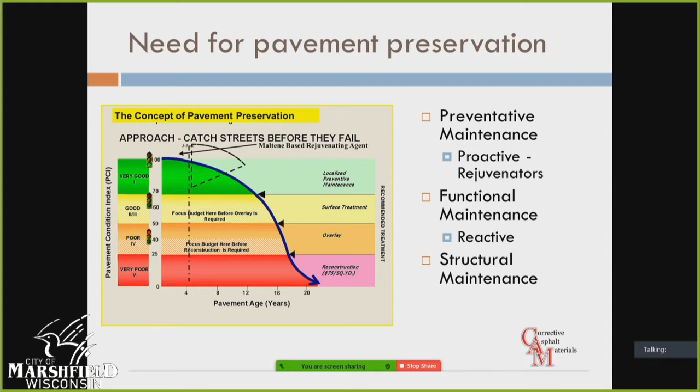But I was going to focus majority on that green section and how to get the most for your money there. Ideally, if you're treating in that green section, instead of bumping your curve out, you're actually bending that curve and adding those extra years onto the life of the pavement.

So the proactive maintenance in that green section - the first step in pavement maintenance is proactive. I like to use the analogy of a deck. The first thing you do to that deck, since it's wood, is seal it because you want that wood to last as long as possible. You continue to seal that wood because you want to keep it good for as long as possible. Decks are not cheap to put in. Same thing with your road - you want to get that road sealed up right away, protect that pavement and protect your investment.

Usually with this proactive approach to asphalt maintenance, you're looking in that 0 to 5 year range. You want to get in there right away when the pavement is in good condition, seal it up, and keep it there for as long as you can. By being proactive in this, you're adding about 5 to 7 years onto the life of the pavement. It's pretty significant - and you can still do any other treatment you'd like to do, you're just pushing all of that further down the road.

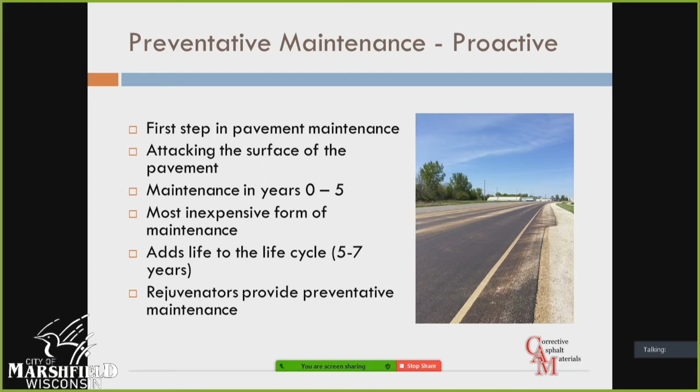Not all products in that green area are considered rejuvenators. According to the National Center for Pavement Preservation, you need to be a maltene-based petroleum product to be a real rejuvenator. Other products will come in and say they're a rejuvenator, but if they're not maltene-based, they are not a rejuvenator. So that's something you need to look for.

I'm going to talk a little bit about maltenes. It's so exciting, and you guys are lucky because today is Maltene Monday. If you follow us on social media, we've been starting our new campaign. There's a relationship in asphalt between your asphaltenes and your maltenes, and those are what make up your asphalt binder.

Maltenes are added to the pavement. That's what keeps it soft and flexible, but that's what gets baked out of the asphalt through the oxidation process. As soon as your asphalt comes out of the plant, it gets heated up really hot, then it gets laid out, and those maltenes are being baked out of the asphalt itself. So what the Reclamite's going to do is replace that maltene fraction back into the pavement. If we go back to the definition of what a rejuvenator is, that's exactly what you want to do. You want to replace that maltene fraction, and slow down that oxidation process.

Your asphaltenes, if a product is asphaltene based, you're looking at the hardening agent. That's what's going to keep that surface harder, brittle on top, and you're going to see more aggregate loss at the surface. So that balance is really important, your asphaltene to maltene ratio.

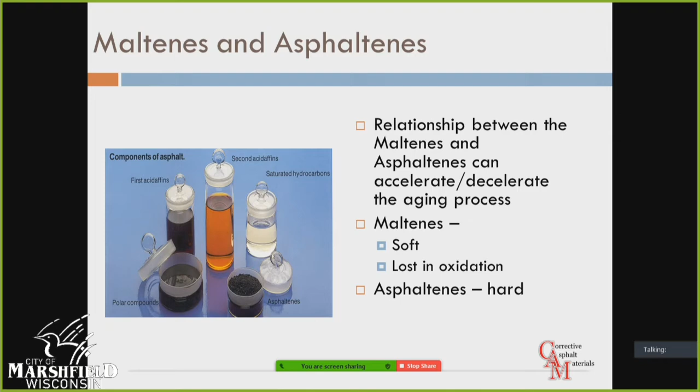I'm just going to talk about Reclamite. It's our maltene-based rejuvenator, a quick application with minimal screenings, applied in that 0 to 5 year range. Since I'm talking about two products, I don't want to confuse everybody, so I brought some material if you'd like. Reclamite is the early, proactive treatment, and CRF is the older, reactive treatment. I'll keep saying that throughout.

This was the little demo we did for Marathon County. They put this on brand new pavement. We came in right after they laid it and treated it. I came back about two months later, and you could see the rest of the road around it was wet, while the treated portion was completely dry. You can see it on the shoulder for sure right there, and you can also see that your striping is intact. I got better photos of that to show.

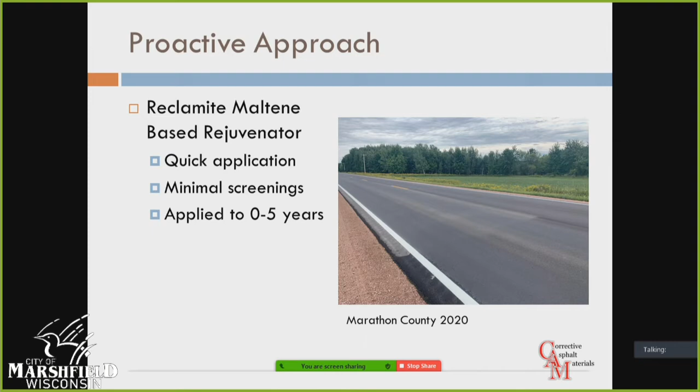Now this is the reactive one, your CRF. Here in Marshfield, you guys had a lot of roads with slag chip seal, and they needed a way to make that last longer so you didn't have to spend money on reconstruction, that red zone where you're spending all the money. This was something new that we tried on the slag portion at least—we've put it over chip seals before, but not with slag aggregate. So we tried it out, and these are the results. I came back in September, and it looks amazing. It's really staying on there, holding on nice.

The CRF is the same product as our Reclamite, only it has a little bit of asphalt content in there. Because it's in that orange zone, it's going to add a little bit back to that surface. There's actually no lift to the pavement at all, but it's going to fill in those smaller cracks and voids, smooth it out, and keep that water out.

Neither of our products add lift to the pavement. They're both in-depth seals, so you're not going to see a plow get underneath it and pull it out. Once it's on there, it's there for the duration of its life. It's not going anywhere.

Usually with the CRF application, you have a heavier amount of screenings that we'll be putting down, and the setup time is a little bit longer. We want roads that are older—I've seen roads that are 3 years old that really could use some CRF, but hopefully we can get roads at least into that 5 to 7-year-old range before we have to come in and apply the CRF. Usually candidates show mild alligatoring, aggregate loss at the surface, and mild cracking.

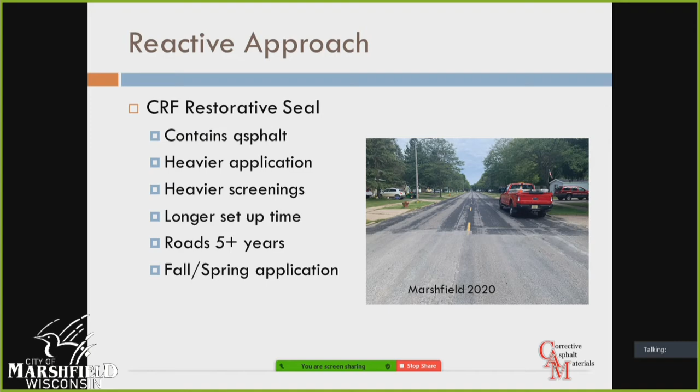All right, so I got into the application process. This is more important for, I guess, us and then also residents as well. They probably like to know about this. We start out with our road selection, which is when I came up, we looked at all the pavement that we had to work with, and I don't want to put product down on a pavement that's not ready.

If it's too far gone for Reclamite, we're not going to put it on the pavement. It's not going to do its job. It's not going to work. CRF, same deal. If it's too far gone and you guys are going to need to come in and do something else that's not CRF, perfect.

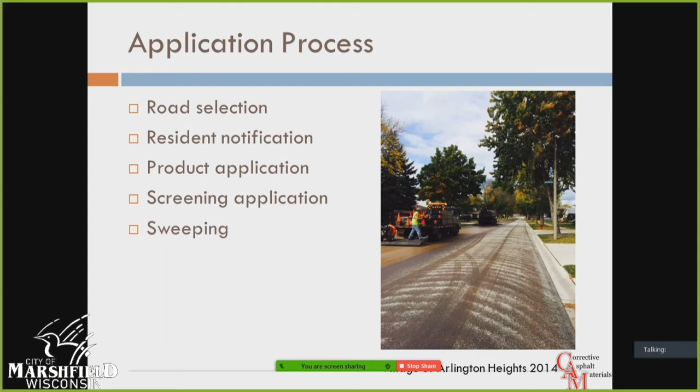Also, if you look at the timeline, now you got a toolbox of tools. Almost every product out there has a spot in that timeline. And you can still do everything else. You're just pushing those more expensive applications and tools further back. So you could still come back and do a chip seal, a microsurface, or a crack fill. You're just doing it much later down the line than you would had you not sealed up your road at the beginning.

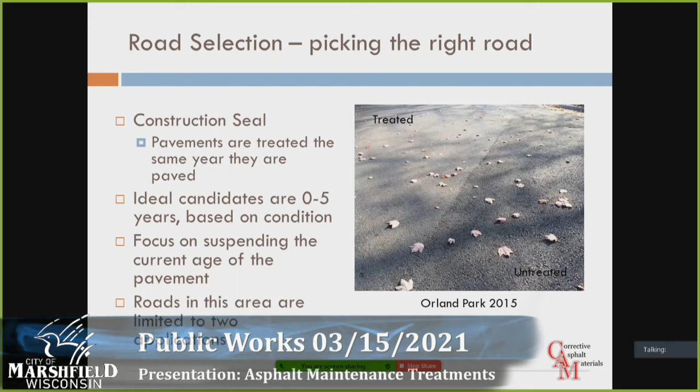Road selection, construction seal. This is what I talked about with Marathon County. We came in, we did brand new pavement. But the great thing about that is you're sealing it up before it hits that first winter. All that water intrusion, that salt intrusion getting in that pavement. By sealing it up, keeping that water out is so important. You don't want that water to get into that pavement and help you lose that aggregate surface.

Like I said, 0 to 5 years, we're suspending the age. We're not reversing the age. So when we come in, we treat 1-year-old pavement. It's pavement that's been sitting for 1 year, has had winter on it, and that's fine, but it's not going to reverse that aging. It's going to hold it where it's at. So if there's one large crack in the road, it's not going to magically make the road come back together again. In this area, you're limited to about 2 applications of Reclamite.

I wouldn't recommend more than that, just because with our freeze thaw, with 1 application of Reclamite, you're going to see a lot of tightening on that pavement. I'd say if you're going to do a second application, you could probably come back in year 5 or 7, depending on what kind of program you have. We're going to use a little less product on that second one because the first application does make it tighter. You'll see that at the surface when I get through some of these photos. But that's about your limit with the Reclamite.

CRF, when you put it on older pavement, it depends on how long. I've had people who want to get just 2 more years squeaked out of a pavement. So this was a solution that worked for them. I've had people put 3 applications of CRF down within a life cycle.

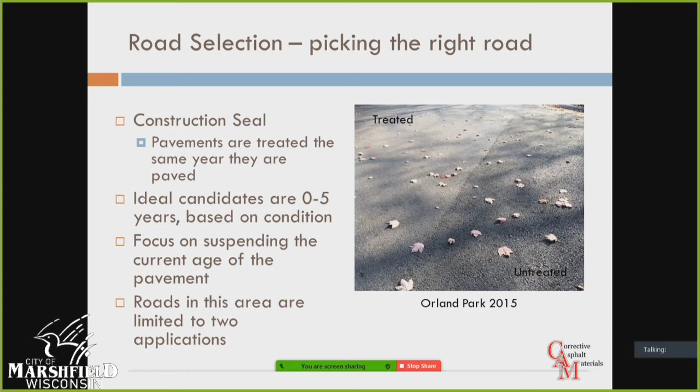So resident notification, we handle it. You guys can handle it. We kind of try to do like a la carte with the pricing anyway for you guys. So whatever you guys want to do, a letter, on our website we have now this year, we have videos and photos, specifically a tab for residents that they can visit and see why they're doing this, what's going to happen, and most importantly, when it's going to be cleaned up, because that's what they care about the most.

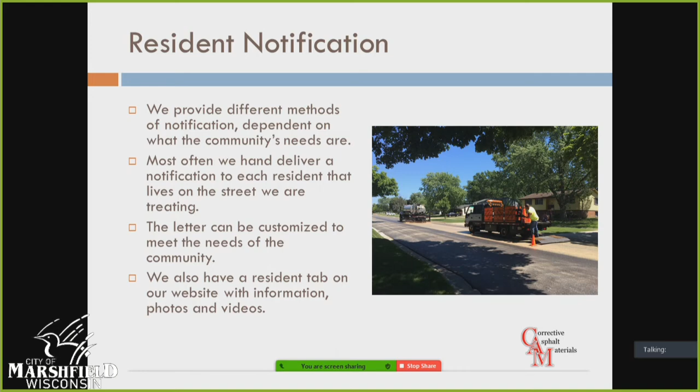Conditions, obviously, we want ideal conditions, 40 degrees and rising, just like when you're paving. We want dry roads, so that is important.

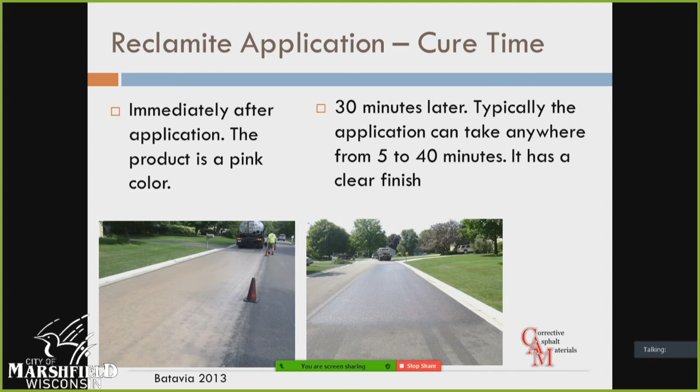So this is your Reclamite application. It goes on this cute pink color, and then in about 30 minutes, it just dries clear. Clear finish is on there. Depending on how hot it is, it could be 5 to 40 minutes. I'd say 30 minutes is about average. Usually by the time the truck's finished and turns around, we can go ahead and do this.

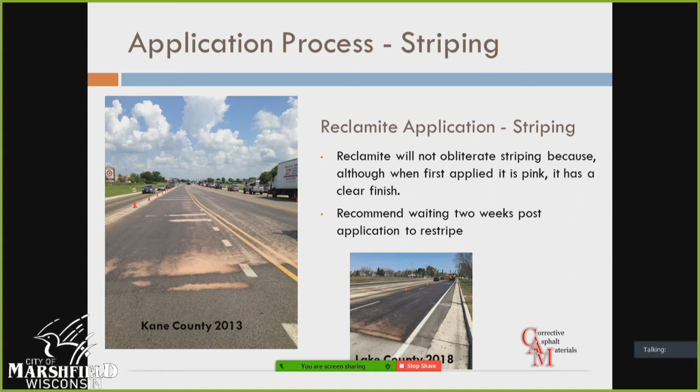Your striping will come through. What's a nice, great thing about the Reclamite is you have a brand new pavement with brand new striping, and you don't want something that's going to cover that up. It's an extra added cost. With the Reclamite, it's a clear finish that striping comes through. You're going to be able to see it again. It will tinge it temporarily, but with regular weathering, it does come back. So that just wanted to show you. If you are going to restripe, I'd recommend 2 weeks.

Anyway, so sweeping.

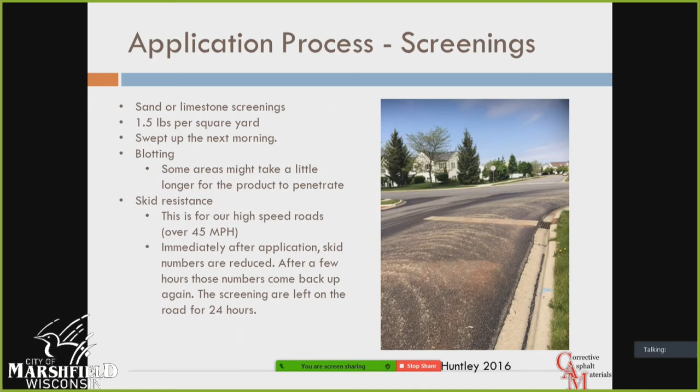Temporarily, those numbers are reduced, but they come back within a few hours. We leave the screenings down for 24 hours, and this photo shows that as well. And there you go, another stop bar popping through.

So then the CRF application takes about 40 minutes to an hour. You're putting it down in colder temperatures. We put this down at a heavier application rate than we do the Reclamite, so we're using a lot more product. It is a little bit darker, but it does have asphalt in it, so it's going to have that darker look.

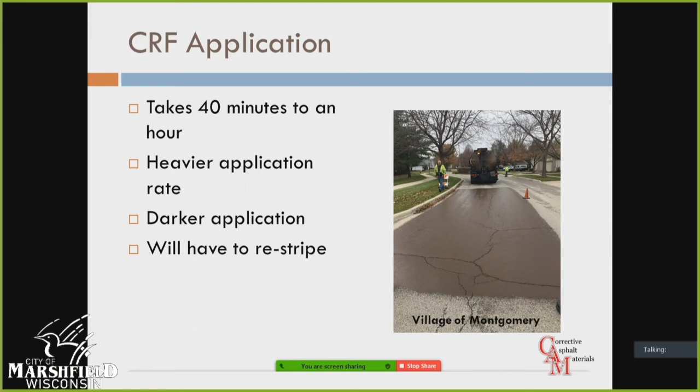It does not finish black, it finishes in a gray color. And you will have to restripe after the CRF, only because it has asphalt in it, so it will cover up your striping. So if you are going to stripe, I recommend waiting 2 weeks after doing that.

Like I said, with the heavier application and the screenings here, there's really no effect on skid resistance with the CRF at all, because we put so much down it has a little more grit to it right off the bat. And we like to keep those screenings down for at least a week.

So this is why resident notification is really important on this product, because you get a lot of residents that say, hey, you're chip sealing my street, what's going on? It's like, no, we're going to clean it up, don't worry. So we like to make sure that we have the notification out there early and everybody knows what's going on.

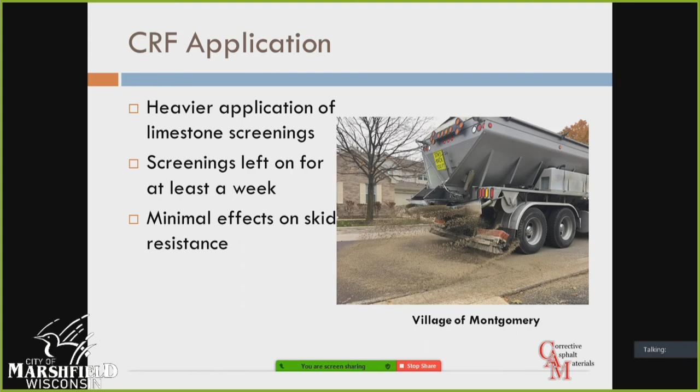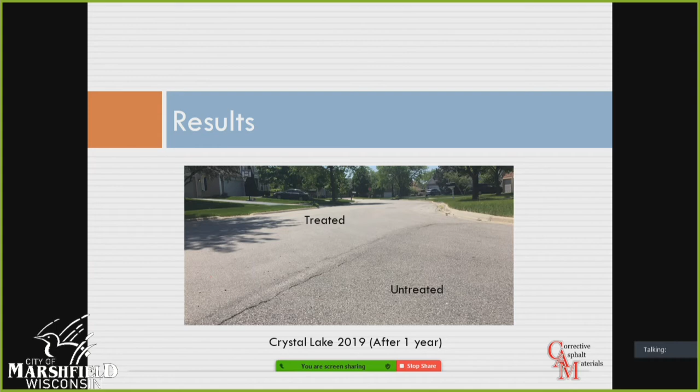Your untreated pavement there is open graded, it's accepting water, and it's oxidizing. And it's a brand new pavement—that's 1-year-old pavement on the untreated portion there. But you can just see how beneficial it is to have that treated portion sealing it up properly.

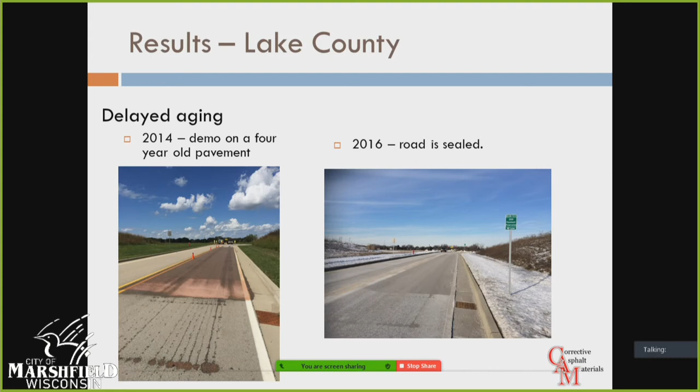I do a lot of county work. This is a county road. I mean, we came back 2 years later, and you can still see where the drip came off the truck for that little demo we did for them. Just that open gradedness, just to show you how tight that pavement could be after 2 years of treatment.

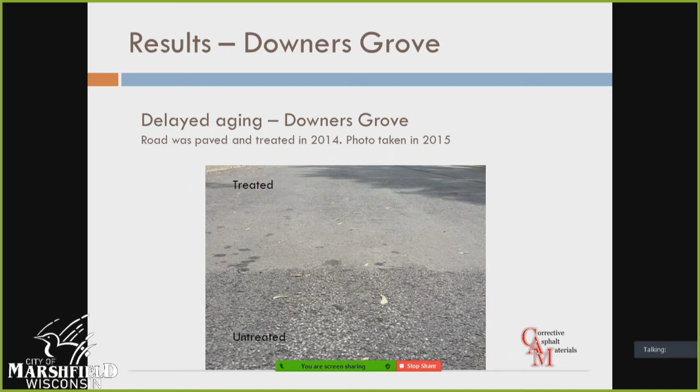This one's a little harder to see, but the next photo will show you. This is the Brookfield, Wisconsin one. So one of the things you're going to see with your treated portions is you're not going to have that water intrusion.

In the morning, you're going to have some residue on the surface, that mist in the morning, though that water is still sitting there underneath, where it's still wet. Your Reclamite-treated pavement is going to dry. So you can see here how the wetness goes right up to the treated section, and everything treated is dry. So that means that pavement is sealed.

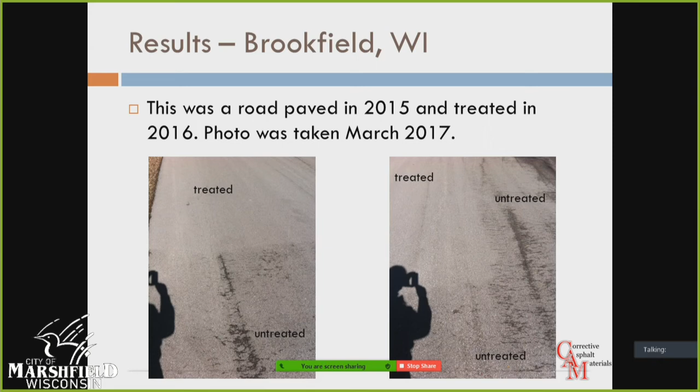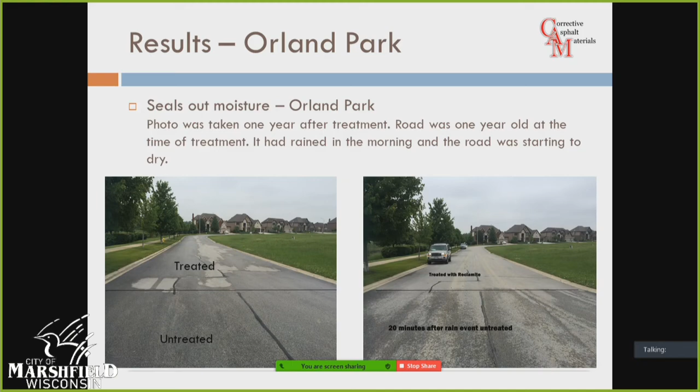Just to show you also the wetness there. I came through after a rainstorm, it was drying. After it dried, as you can see on the other side, the whole treated portion is dry. Everything untreated is wet, and it does look like that. You can see that line—it's very definitive like that.

Just another one, treated it here and then came back after the morning. This is about after a year, just a close-up to show you that tight surface.

So this isn't going to reduce your salt usage, but in a small amount of snow, we find that the snow has a hard time sticking to the pavement. It's because that surface is sealed, the snow has nothing to stick to.

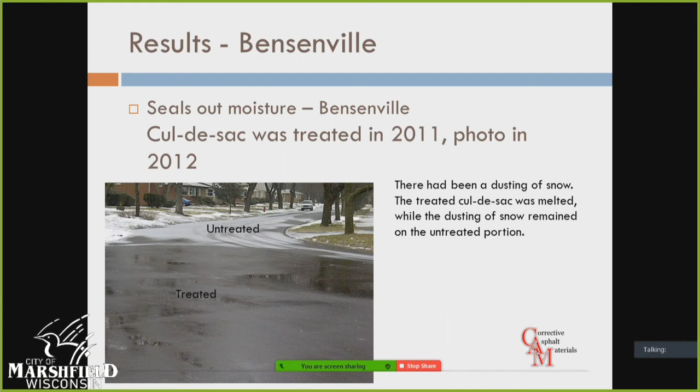And so we have villages and municipalities that claim their salt use is more affected on their treated versus their untreated streets. Quantitatively, I don't have any information for you, as we all know every plow driver is a little different, so it's kind of hard to gauge measurement on how much we're actually saving on salt usage. But I thought this was an added benefit, and I thought it was kind of cool to go out there and actually see it happening.

This just shows you, once your Reclamite becomes part of the pavement, it's there for the duration of its life. It's not going anywhere. So this is 19 years old, and yeah, there's some aging and some raveling and some cracking, but that section that's treated will always age more slowly than everything else.

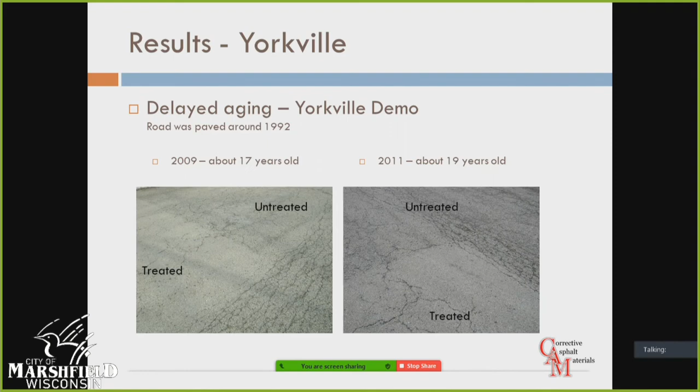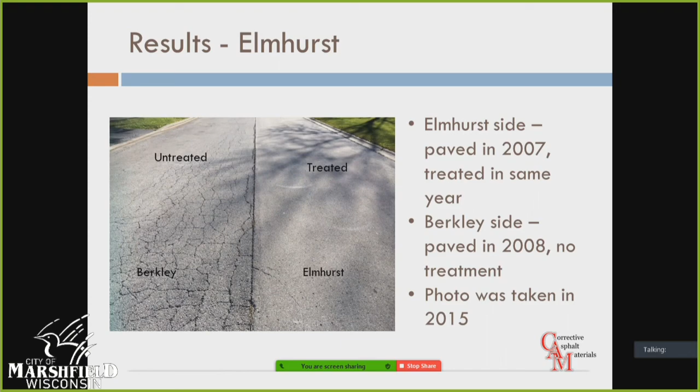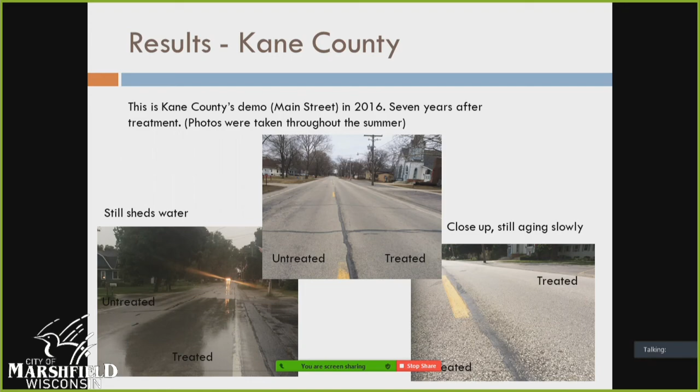Just going through these real quick, and I'll show you some CRF. This is one of my big projects I started in 2009, one of my first with the company and one of my first big county jobs. I'm proud of it because it's still there and looks really good. The untreated side is all deteriorated, falling apart. The treated side is intact, with minimal crack fill used. They're not going to have to do anything to that pavement for a long time still.

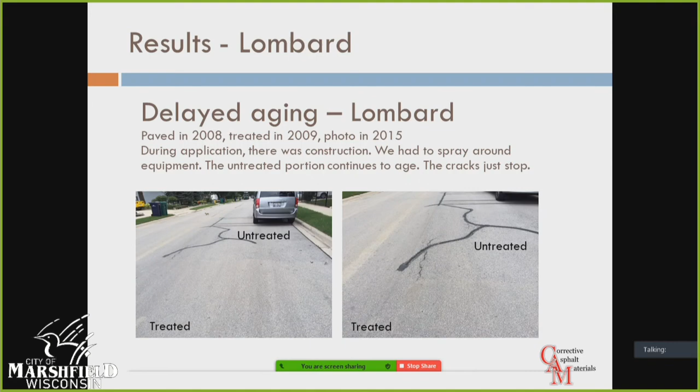Another one right here. I was actually on the crew for this, and you can see the untreated portion had to be crack filled. There's cracks that end right at the treated portion. And here come 2 years after that. You can see how that ongoing oxidation is affecting the pavement, whereas the treated portion is sealed, still intact, still holding on strong.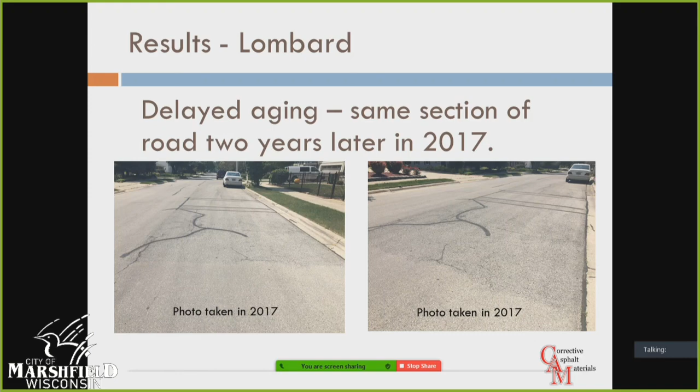Just another one to show that moisture, treated versus untreated. We only treated one side for them. And then I think I move into CRF.

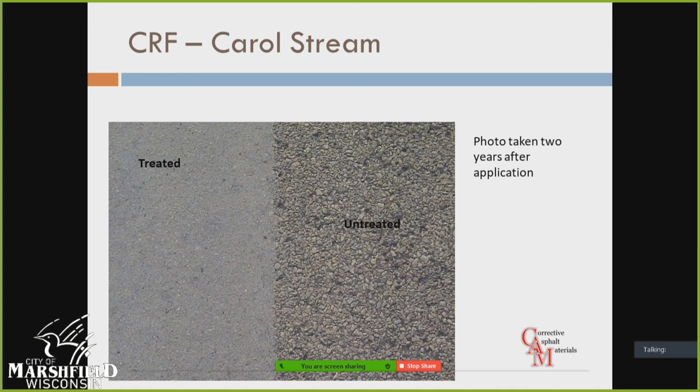So CRF is a little bit different. Like I said, it has that asphalt content in there, and you are adding a little bit into that asphalt. This is Carol Stream. These are the kind of results you're going to see with the CRF. It's going to fill in some of those smaller cracks and voids. It's going to have a little bit of a different look, a darker look. It's not going to be black and sparkly, but it does put a nice, smooth finish onto the pavement.

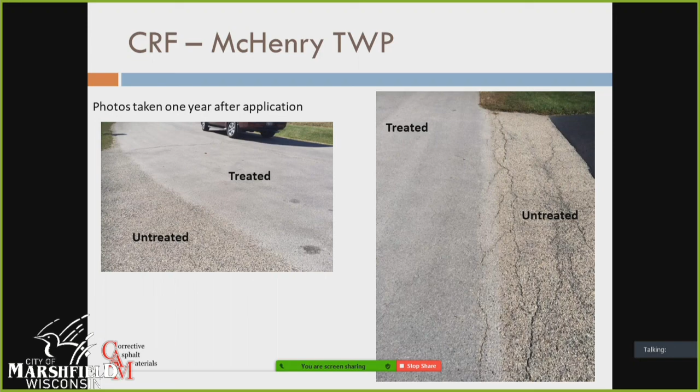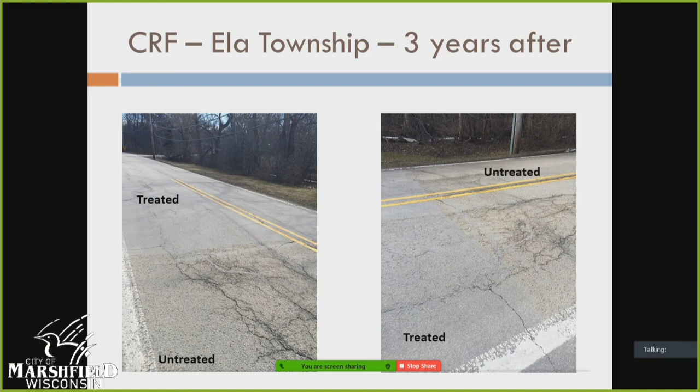This is just another one 3 years after treatment. Like I said, it's not going anywhere. Once it's on the pavement, it's there for the duration of its life. Yep, this is just another little section to show it off. And I believe that concludes my slideshow. If anybody has questions, I'd love to answer them.

Any questions from the board? I do, thank you, presentation was great. But my question is, why do cities do one half of the road and not the other? It's just for demonstration. And we've actually done it where we've come back and treated everything. But it's one thing they can show to see, because sometimes we'll do a smaller pilot project, and they can watch it for a year before they go through. Especially with the CRF, I like to dip our toes in a little bit before they jump in head first, because doing a very aggressive CRF program off the bat could be overwhelming for residents, since the product is down for so long. But if you're used to it and understand the product, it makes it a lot easier. So I feel like just a small amount, at least to get started, helps more than going in head first.

Anybody else? Tom? What are the typical costs per square for doing these types of products? So with the CRF, we like to do it a la carte. I believe last year we were at $1.45 a square yard for the CRF product, and I believe we did the resident notification for that as well. Yeah, we did everything, so that's turnkey. We like to do all that - sweeping, traffic control, resident notification, all of that. Now, if the city or municipality wants to handle any portion of that, we can bring the cost down. Sometimes it's easier for us just to do it all and say, here you go. With the Reclamite, we're about in the dollar range, but that's turnkey as well, so we'll come in and do everything for that. And those prices are based on quantity as well.